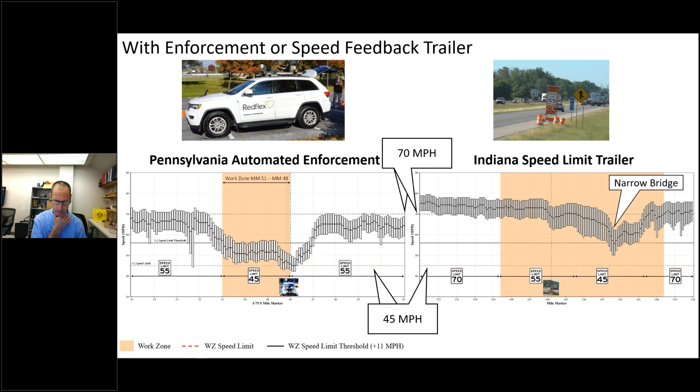And quite honestly, this slide you see right here, I often call it the GIGO figure. One of my colleagues is on the line, but when we were able to use connected vehicle data and see the impact that PennDOT was having with their automated enforcement, that was an absolute game changer in Indiana in terms of what we saw as the benefit of that technique.

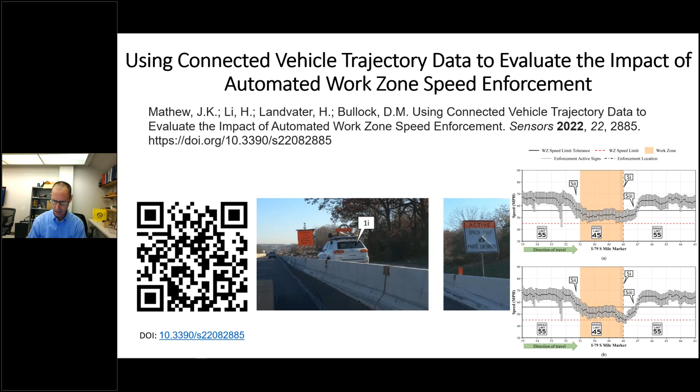So Juan, great presentation before, and I think ARTBA, as you've organized this peer exchange, it's really a good venue to share some of the stories. What I'm going to talk about right now is give you a quick overview of where I'm coming from at the Joint Transportation Research Program, the pool fund study that Jawad is involved with, and then go through a couple nice case studies.

Those of you who know me know I'm a big believer in the pool fund study program. This is a picture we had a couple years ago with Ohio on traffic signal space. The most current one that I'm going to talk about today, Jawad is the FHWA technical liaison. John McGregor at INDOT has been our study champion. And this QR code talks about some of the work that we have done to define how we can use connected vehicle data for work zone metrics.

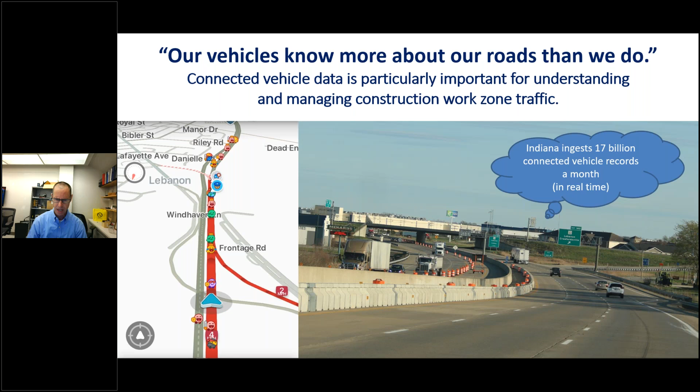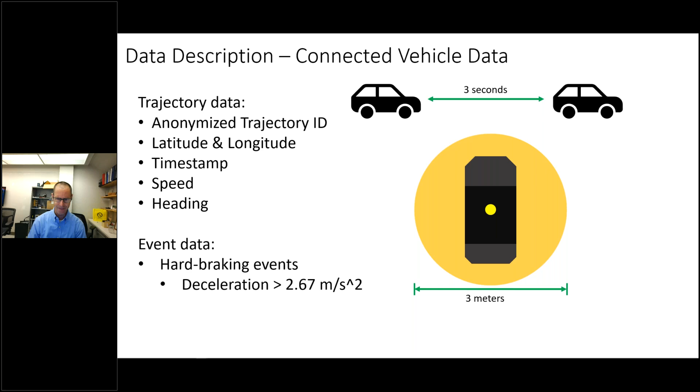And I often say our vehicles know more about our roads than we do. The connected vehicle data is the key to that. Skylar will talk a little bit more about this later. But quite honestly, it's the breadcrumbs that vehicles drop on the interstate virtually. We typically see about 5% of the vehicles in Indiana are connected vehicles. That looks like a snapshot across the whole country.

And for those around the country who have not seen this video before, this is the best way I like to explain connected vehicle data. This is a sped up view of a little over an hour and a half of connected vehicle data on I-69 in Indiana in the northeast quadrant of the state. If we look at those virtual dots, each one of those are vehicles. If you look on the right-hand side, you see the congestion where it's located, and then if you look at the left, you see a time space location.

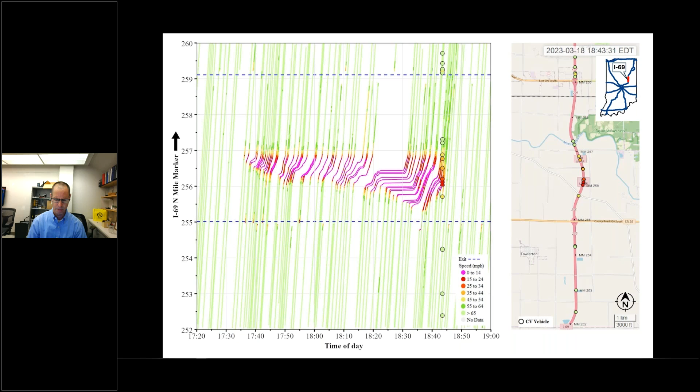We're just coming to the period right now in the animation where we see stopped vehicles and no data moving through that lane restriction there in a work zone. And I often joke, no data is information. So when we see those blank spots, that no data is information.

And I'm sure every state on the webinar today has these sad stories. What we're using connected vehicle data for is to hopefully design work zones so we don't have queuing, but if we do have queuing out there, what can we do to mitigate that queuing? And one of the really powerful tools that we found is combining the dash cam imagery with connected vehicle data. I'm going to just show you an example.

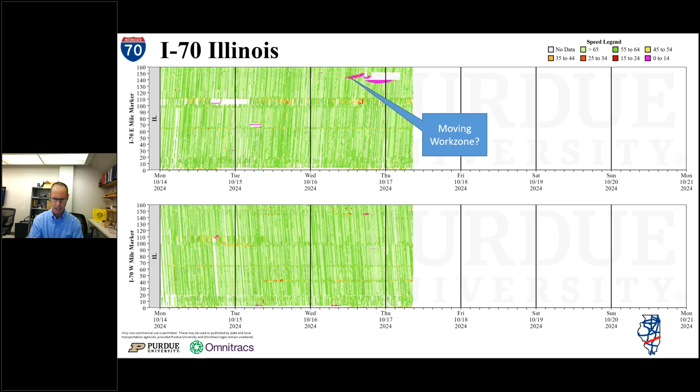So the ability to go in and look around virtually at what's going on, what was that work operation. In this particular case, it was followed by a back of queue, and you can see the arrow there pointing at the time of that work zone.

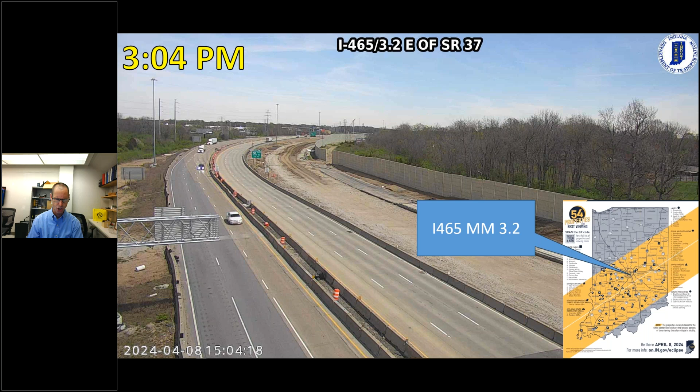The other one, I'm just going to hit on real quickly because I think we have a relatively short period of time. I'm going to talk about the eclipse. This is a bit further. I realize this isn't directly related to work zones, but I want to demonstrate the power and scalability of this connected vehicle data. And the eclipse impacted several states that are on this call. A pretty phenomenal amount of planning went in. 3:04, 3:06, 2 minutes later, we're totally dark, and then we come out of it.

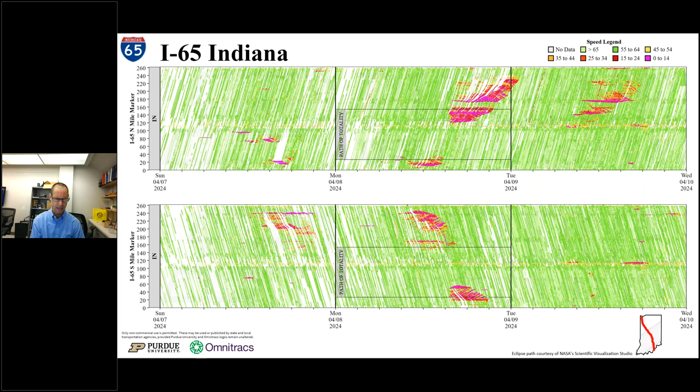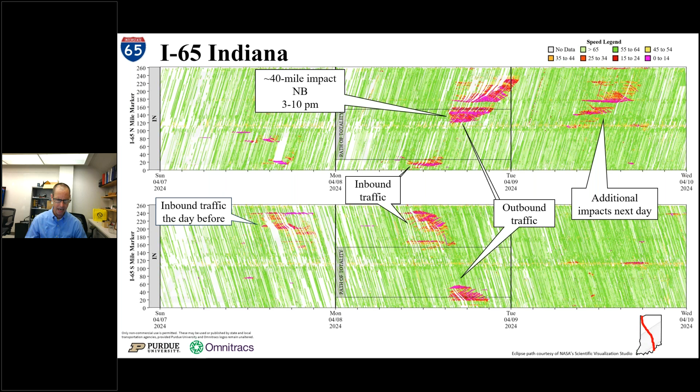What I'm showing you here on the heat map is connected vehicle data, trucks in this case, the path of totality. You can see Sunday, the inbound traffic. You can see the inbound traffic on Monday that didn't quite make it. And then you can see the outbound traffic around the center of the path. And you can actually look at some of the camera images. In some cases we had people camped out, picnic sites along the interstate.

But as we get a little closer towards the path of totality where they didn't quite make it, we see people parked on the entrance ramp. Notice the time, they didn't make it into totality. And we'll go just a little bit further. If you look at the tractor trailer parked up here in the gore and the white car behind the truck, not ideal parking space. You can see somebody getting out.

The point here is not that the eclipses only happen every once in a while. I hope what I have shown here is this diversity of images that when we pair with connected vehicle data to see we have some anomaly out there on the interstate, and then to be able to pair it with what is going on there is incredibly powerful.

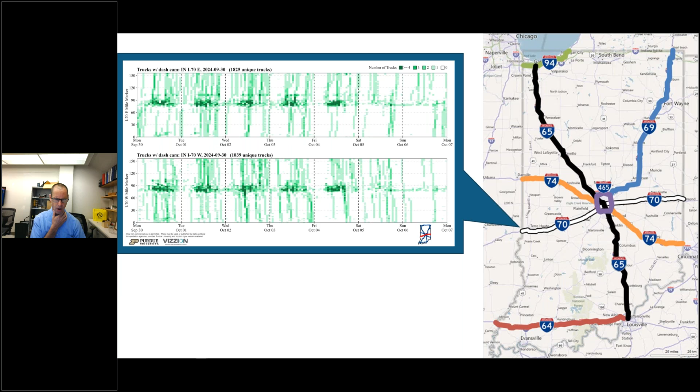And the question I always get on this is, well, how frequently do these connected trucks with cameras go by? And this is an image right here of a heat map just showing you late September, early October. One of my colleagues, Rahul, prepared it. This is for Indiana, from mile marker 0 to 150. And you can see multiple times a day we have trucks coming through, maybe less on Saturday and Sunday, where we can pull those dash cam images and add context to our work zone reports.

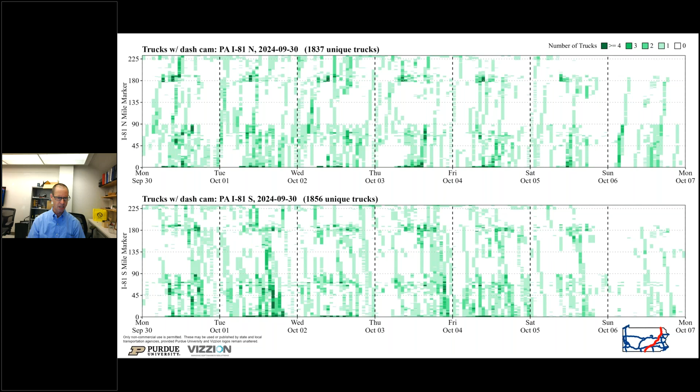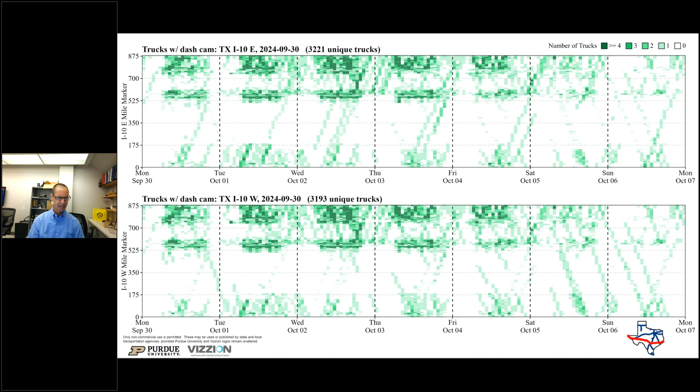And we can pull these for all of our partner states in the pooled fund. This is some images from Pennsylvania. This is the availability you see on Pennsylvania I-81. And I pulled Texas. You can pull I-10, over an 870-mile stretch, maybe rural Texas, not so much visibility during the day, but certainly along the locations in Houston, et cetera, you've got good connectivity.

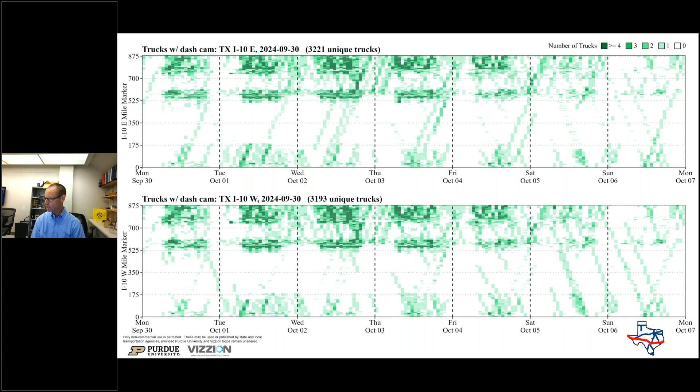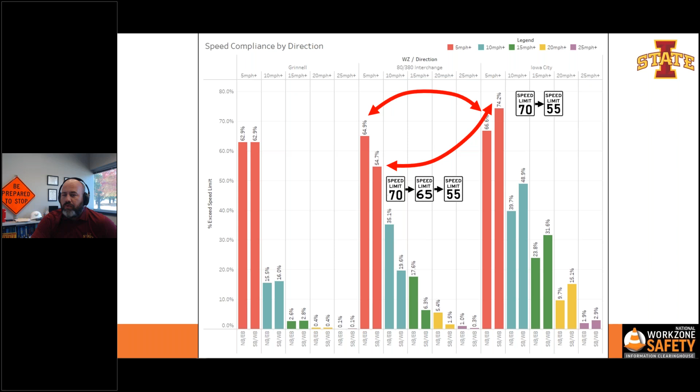But we don't see that same thing whenever we looked at the area that was going from 70, 65 down to 55. We actually see better speed compliance, even though we're starting at a higher speed limit as they're approaching the work zone, which gives us some, hopefully, baseline information that we can leverage to possibly implement this or just further explore whether us having that step down approach to the speed limits may be improving speed limit compliance as vehicles are entering the work zone.

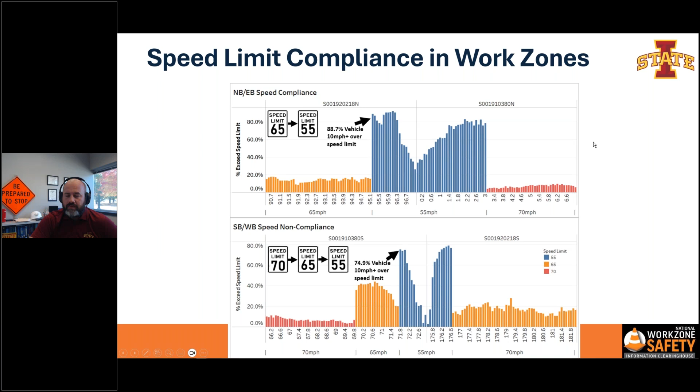If we coordinated this with a speed safety program like Kyle and Juan were talking about, this could potentially be used to identify areas where we are having higher amounts of speed non-compliance for potential targeted enforcement of areas within the work zone for reducing those speeds and improving the speed compliance. So that summarizes what we looked at with the connected vehicle data in terms of speed limit compliance.

Hopefully with this, some next steps will be moving from not just providing a summary of the speed limit compliance, but alerting Iowa DOT as well as Iowa State Patrol of potential work zones that have speed non-compliance issues, and looking at different ways of what alerts could be generated. So is it changes in speed compliance over time, or is it changes in speed compliance spatially within the work zone? But there's a lot of opportunities for us to leverage this and use this high quality and high fidelity data for monitoring the speed compliance within the work zone.

And now I'll transition to our second use case, which was identifying lane closure use case. So Darcy mentioned before the breadcrumbs every 1 to 3 seconds. And the picture here is showing one of those trips from the connected vehicle data where we do get that breadcrumb every 1 to 3 seconds. And you can see them traveling along US 30 in this case, and then taking that ramp to go southbound on Interstate 35.

And if you've heard me talk in other conferences, it's most likely been about connected arrow boards. And one of the other areas of interest that I commonly present on is really tracking where our work zones are and being able to report out to the public, or just for a DOT's own awareness of where their work zones are, and connected arrow boards provide that capability.

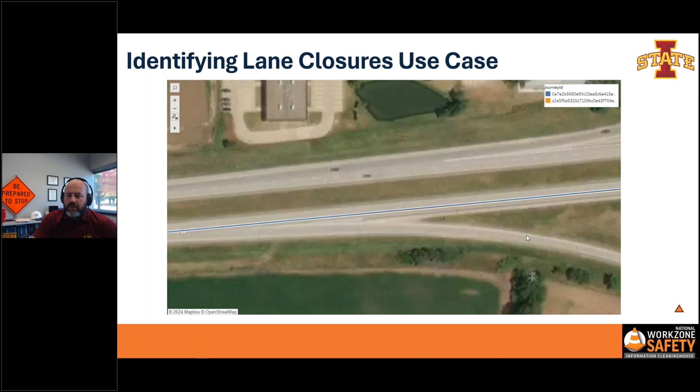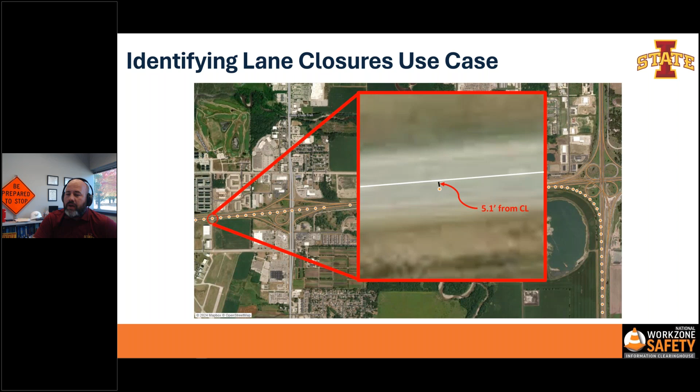And how we did this was by comparing it to the center line of the roadway. So in Iowa, we used Iowa's ARNOLD network, which is the all linear reference roadways in Iowa, and used that as kind of a reference point. So we would calculate how far that vehicle was from the center line, and then we would also use the directionality, so whether it was to the left of the line or to the right of the line, to determine what that spatial position of the vehicle was.

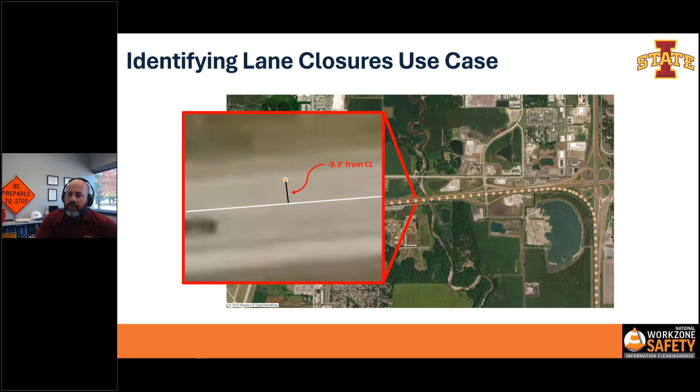And with this, we could then calculate what the distribution of vehicles were for, again, that 1/10 of a mile segment, of them being in the left or the right lane. And then with that, we developed a model where we leveraged the distance from the reference line and the speed and compared that to a baseline time period to determine how much differences there were.

So in the CDF plot to the left, the blue and green lines, you can really see those lines are right on top of each other. So to us, that indicates there's nothing that's changing. Everything's the same. But in the chart to the right, you can actually see that orange line, which is the 21st week of the year, compared to the blue line. There's a shift to the right, which indicates there's more vehicles in that right lane compared to the time period where there was no work zone.

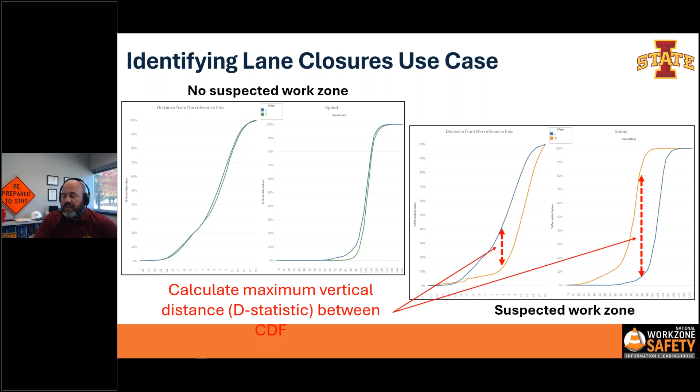And then the speeds, with most work zones, we expect that there will be at least some reduction in speed. Here we see a shift to the left, indicating that there are lower speeds traveling on this segment of roadway. And with this combination of the distribution changes for the lane position, as well as the speed, we can develop a model that says, okay, all these ones where we have a shift in the lane positions and the speed, we're going to call those suspected work zones. And whenever there's no real changes, the same as the baseline time period, those are going to be not suspected work zones.

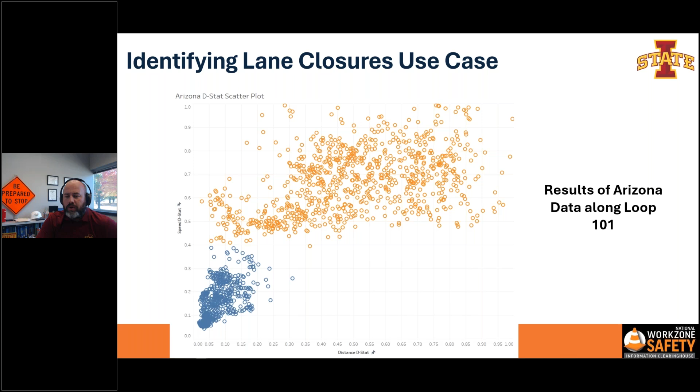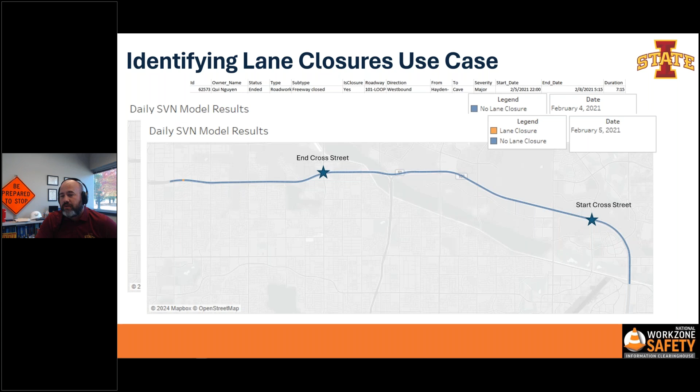And so just to give an example, here's one that we explored in Arizona along Loop 101 in the northeast corner of Phoenix. So this was a work zone that was going to have a lane closure from February 5th to February 8th. If we look at February 4th, everything's blue, indicating that there was no lane closures predicted by the model. If we look at February 5th, the model also predicts that there was no lane closures, but this was due to the work zone only starting at 10 p.m. at night. So just not enough data to really support the identification of a lane closure.

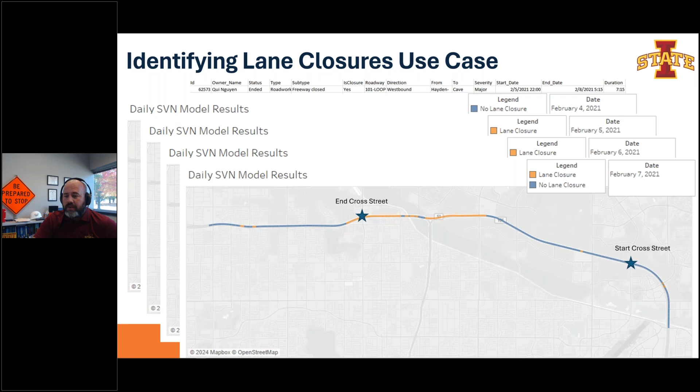And then once the 6th comes around, when we actually have that lane closure for an entire day, we can start to see the models predicting locations near the end location of the work zone. But there's probably other parts of the work zone that they simply just used the cross street that didn't align exactly with where the work zone was estimated to start. And then we look at February 7th, we see similar results of the same approximate location of the lane closure. So some promising insights of the model that was developed and the ability for identifying the lane closures.

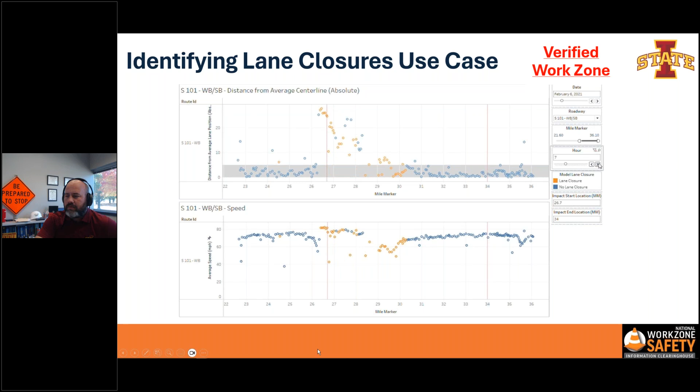And so, in summary of how the model performed, there's still areas for improvement. We ultimately identified a little less than half of the work zones, and we're able to compare that to a database that Arizona DOT was able to provide. There was around a quarter of the work zones that were not detected.

The somewhat misleading part of this is I think everyone can agree the DOTs don't always have the best database of work zones. I work with the data in Iowa, and I know we have work zones out there that are reported, but we're not actually doing any activity. So these could be valid, not detected applications of the model, or they could just be work zones that were reported, but they didn't actually work because of rain or any other contributing aspects to the work zone.

And then the other quarter were work zones that we do feel that there was a work zone based on that raw data that we were looking at, or the hourly summary data that we were looking at. And this is really where we feel the model can definitely be improved by adjusting the extents of the model or the limits of the model to more accurately capture where those lane closures are starting and stopping.